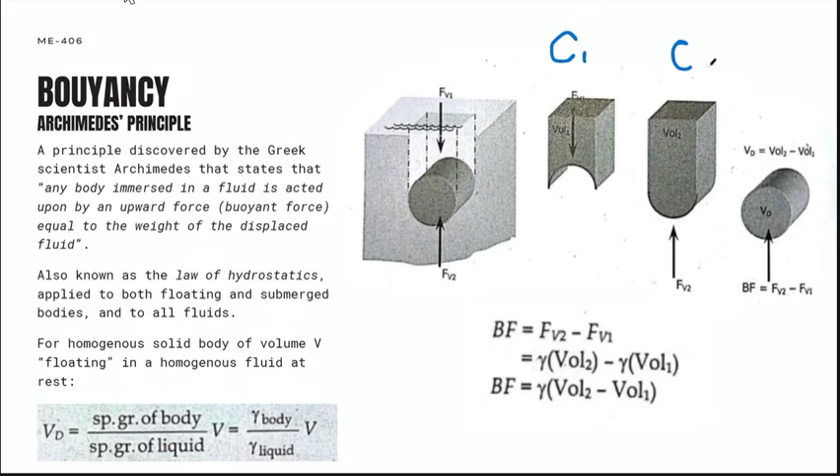If you recall, this is case 1 for our curved surfaces, and this is case 2. You'll notice that case 2 is actually equal to this area.

Whatever fluid is in this area, whatever is in this fluid here, for us to get just this area, we would need this shape, then this volume. When we subtract this from this, we get the displaced volume.

Volume 2 minus volume 1 is equal to the displaced volume. And whatever force is here, the force at 2, and the force at 1, which is the force exerted by the amount of fluid here and the force exerted by the amount of fluid here, we can see that their difference is actually the buoyant force.

Again, the principle is that any body immersed in a fluid is acted upon by an upward force called the buoyant force, which is equal to the weight of the displaced fluid - this being the displaced fluid, this shape here.

Now we can express the buoyant force (BF) as the specific weight of the fluid multiplied by the volume of the displaced fluid, this being the specific weight of the surrounding fluid, multiplied by the displaced volume.

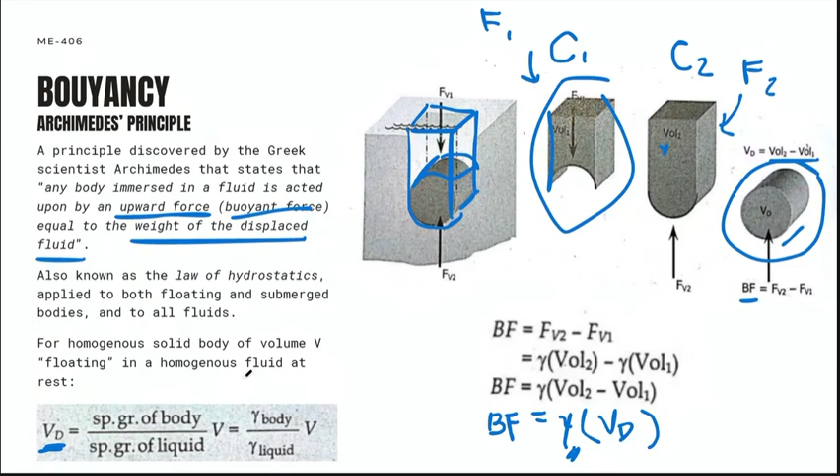We can also calculate the displaced volume in a case where the body and the fluid are homogeneous - meaning the composition of the body and the fluid itself are uniform. So here, it is the ratio of the specific gravity of the body to the specific gravity of the liquid, multiplied by the total volume.

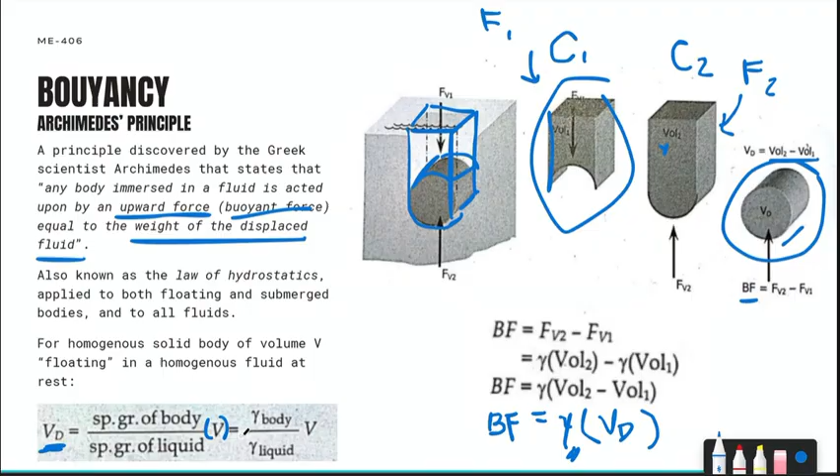The total volume being volume number 2. This is actually the total volume, this entire thing, this entire shape.

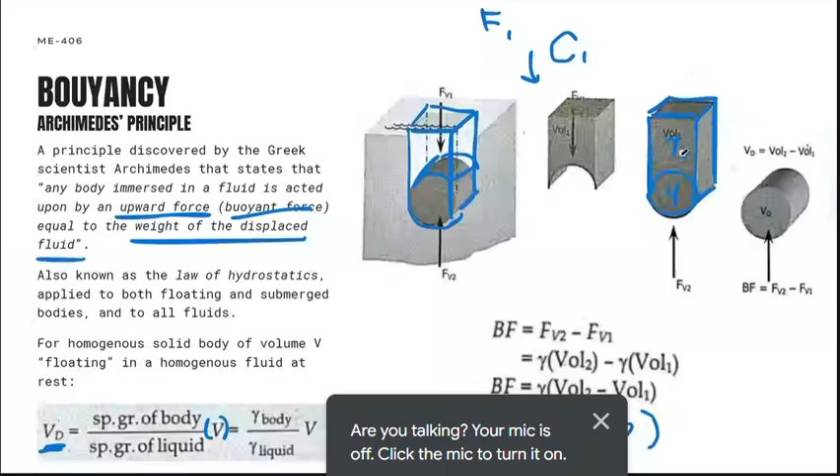Actually, let's reconsider what to call this for this case - it is the total volume. But we'll see our use of the formula later on. Basically, since it has a ratio, normally this is the specific gravity of the body, and this is the specific gravity of the liquid itself, because this is a fluid.

The surrounding fluid - its composition is the same as here. So when you get the ratio of them, and then multiply it by the total body, you are able to get the displaced volume. Is that understood, everyone?

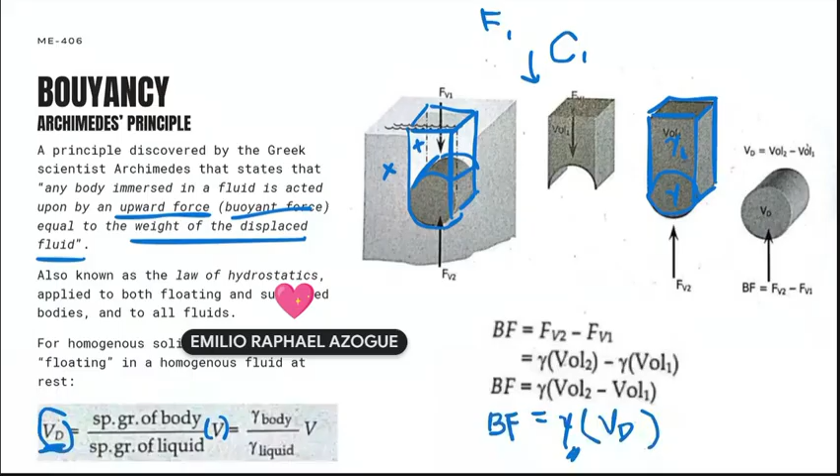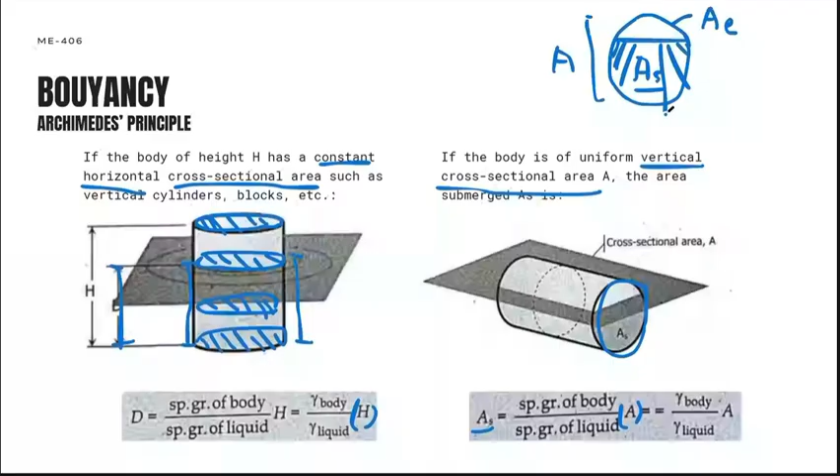We can find the area of this submerged area by having the ratio of the body over the liquid multiplied by the total cross-sectional area. This will prove useful when getting these areas or heights in problem solving later on. Is that understood, everyone?

Okay, because again, this problem solving topic is very much reliant on geometry, reliant on spatial understanding or critical understanding on spatial analysis. So let's move on to our problem solving.

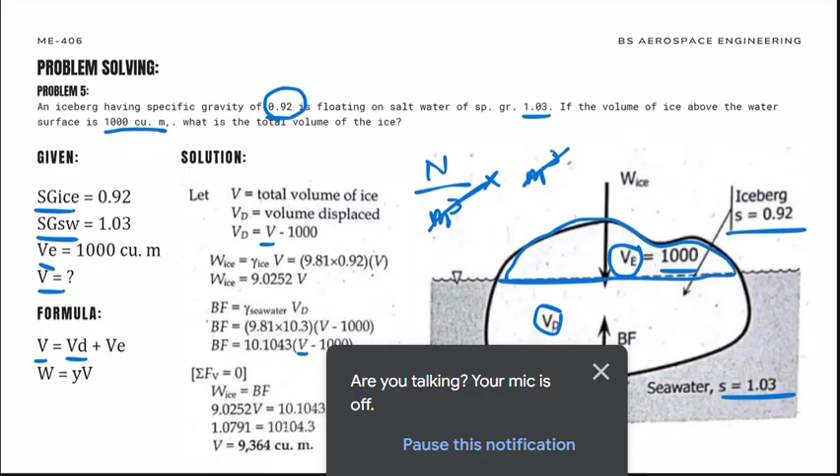So with those established formulas, let V be the total volume of ice as stated here, and VD be the volume displaced. So we express the displaced volume in terms of the total volume, because by the end we're going to be solving for V through two equations where specific values are expressed in terms of the total value.

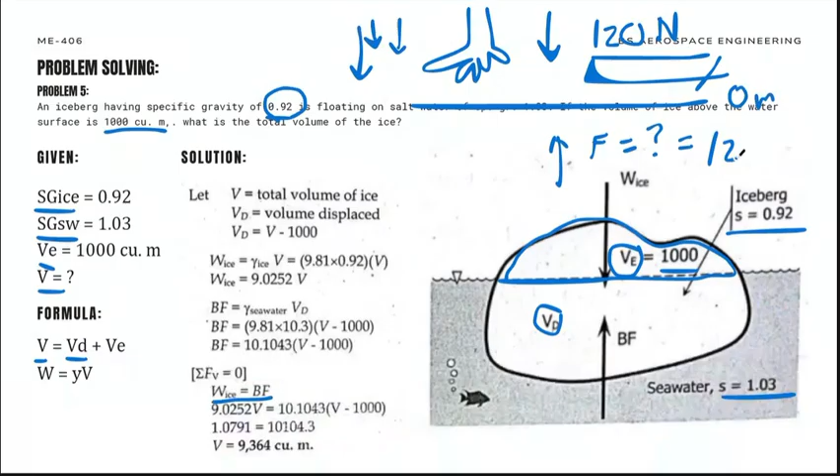Imagine, let's go back to simple classical Newtonian physics. Imagine I am pushing with a force of 120 Newtons. How much force would it take for me to reach equilibrium, or a displacement of zero? Meaning, when I'm pushing at a certain force, how much force is needed? Of course when I push, I'm moving, right? If nothing stops me, I keep moving continuously. How much force would it take to stop me so that I'm still exerting 120 Newtons of force? Of course, you're going to need 120 Newtons of force as well.

So the same principle is applied here: the weight of the ice—of course, there is a gravitational force pulling down the ice.

How much force does it take to get up? That is the buoyant force. The buoyant force is making the entire body float, so it doesn't go down. It's staying here in equilibrium. We need to establish that the weight of the ice

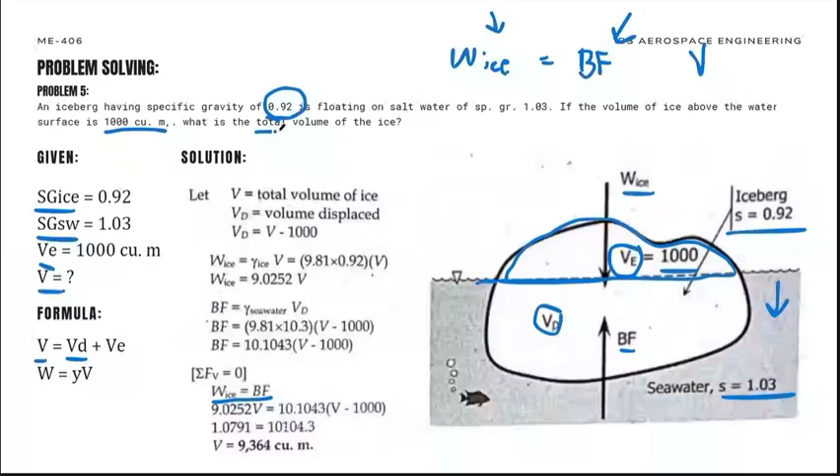is equal to the buoyant force. Because of this, we need to find the equation for this and the equation for that in terms of V, so we can solve the total volume, which is what we're looking for in the problem. Now, what is the formula for the weight of ice?

We have a couple of formulas. We have mass times gravity. But however, we need to express it in terms of V. What formula of weight includes V?

It's actually the specific weight multiplied by V, because the specific weight multiplied by the volume leaves us with a force value. Because of that, we have this: the specific weight of ice multiplied by the total volume.

How do we find the specific weight of ice? Going back to our property of fluids lesson, the specific weight of ice can be attained by multiplying the specific weight of water by its specific gravity. The specific gravity is the ratio of the specific weight of the fluid or body over the specific weight of water. The same applies for the density of the fluid over the density of water.

If we want to get this, we multiply the specific weight of water by the specific gravity. Just a recap of what we've learned before. We have 9.81, the specific weight of water, multiplied by 0.92, the specific gravity of the iceberg. Multiplying that together, we get the weight of ice equals 9.0252 multiplied by the volume. That's one equation we'll use later.

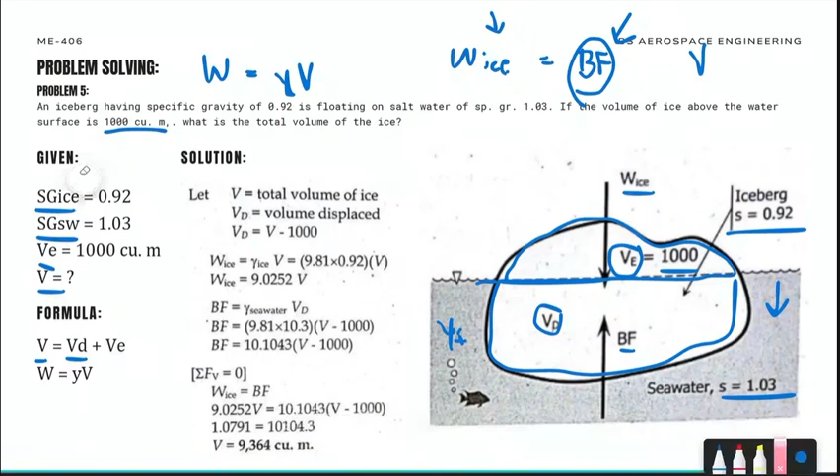Since we have our first equation and second equation, and they're equal, we can equate them. When we equate them, we have a single missing variable, V. You multiply this to this, subtract this from this, transpose this, and you eventually get this formula - it should have a V. You divide both sides by 1.0791, and you get the total volume, which is 9,364 cubic meters. That's how you attain the total volume of the iceberg in this problem.

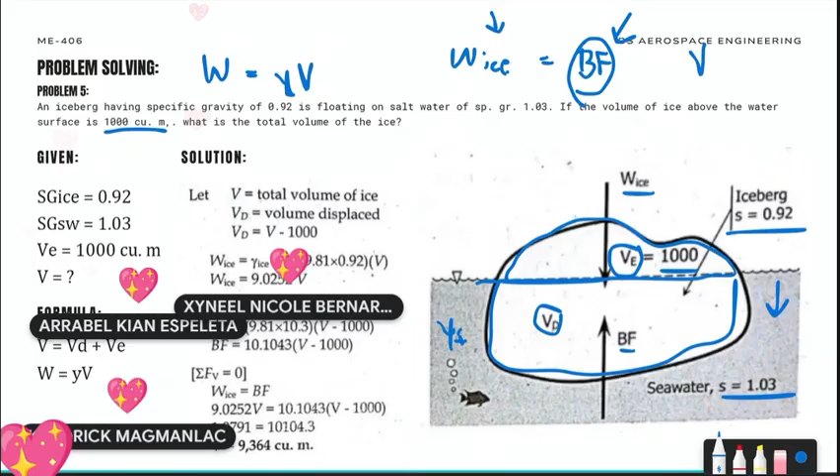Is that understood, everyone? Any questions? Okay, no questions so far.

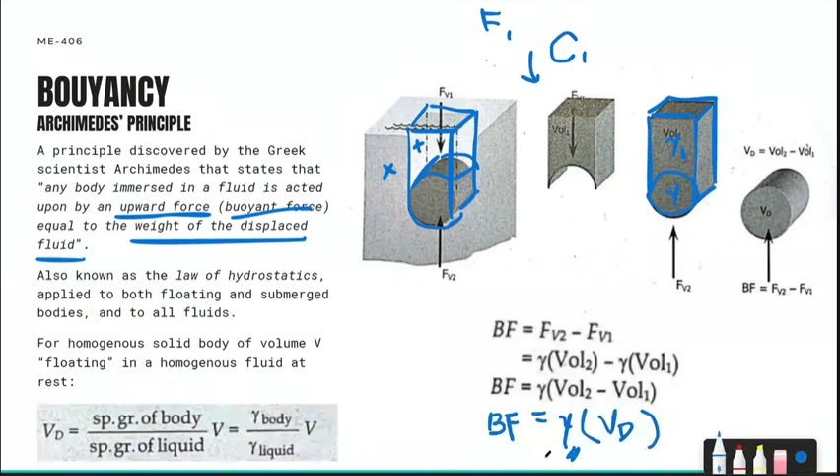Let's move on to another buoyant force problem. Actually, we have an alternate solution here. Didn't we mention before that the displaced volume can actually be calculated by having the ratio of the body and the liquid multiplied by the total volume?

Using that idea, the ratio of the specific weight of the body over the specific weight of the liquid, or the specific gravity directly, that's fine too. We multiply it by the total volume of the body. Since this is what we're looking for, how do we express the total displaced volume? The displaced volume is equal to the total volume minus 1,000, which is this.

Because of that, we have an equilibrium again in terms of total volume. To solve this, shift solve or transpose, and you get the same value of 9,364 cubic meters. Is that understood, utilizing that concept?

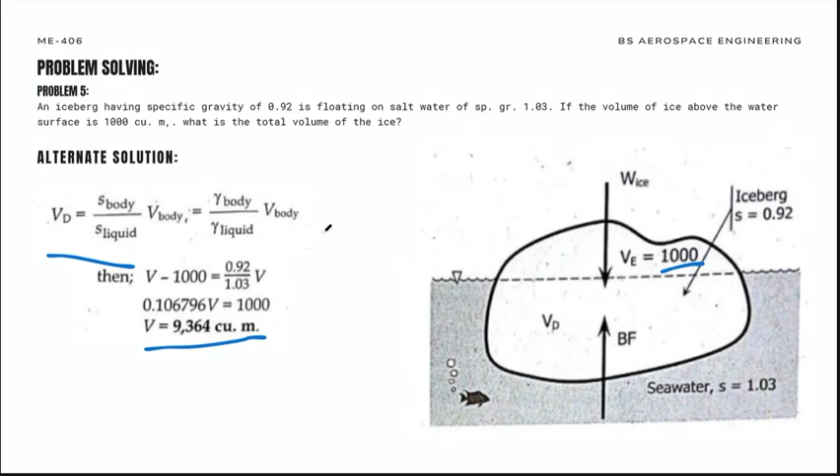Okay, thank you so much.

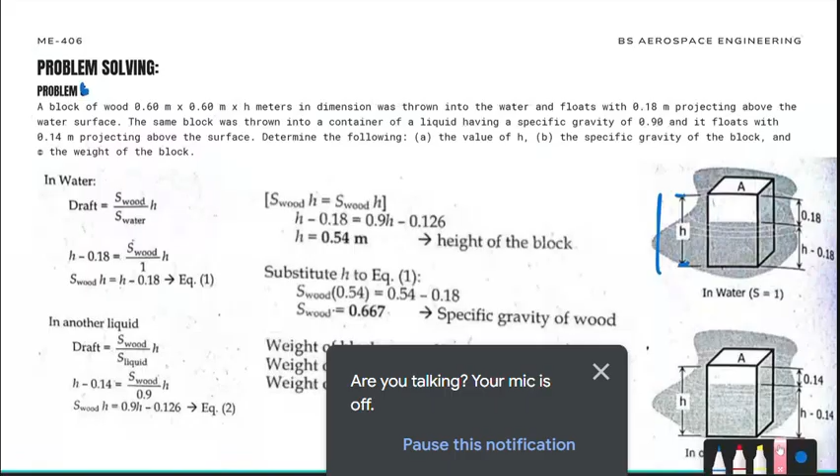Now let's move on to another buoyant force problem ulit. So ito naman, another problem, number 6 dapat ito. A block of wood, 0.60 meters by 0.60 meters by h height, ito may specific h na height daw siya, in dimension, was thrown into water and floats with 0.18 projecting above the water surface. So kapag tinapon daw yung block of wood na ito into water, you have a height of 0.18 doon sa floating, yung sa exposed na height.

The same block naman ulit is thrown into another container of liquid with a specific gravity of 0.9 and it floats with 0.14. May projecting height siya of 0.14 on the exposed surface. Determine the following. What is the value of h? Ano yung total height ng block? What's the specific gravity of the block? And what is the weight of the block?

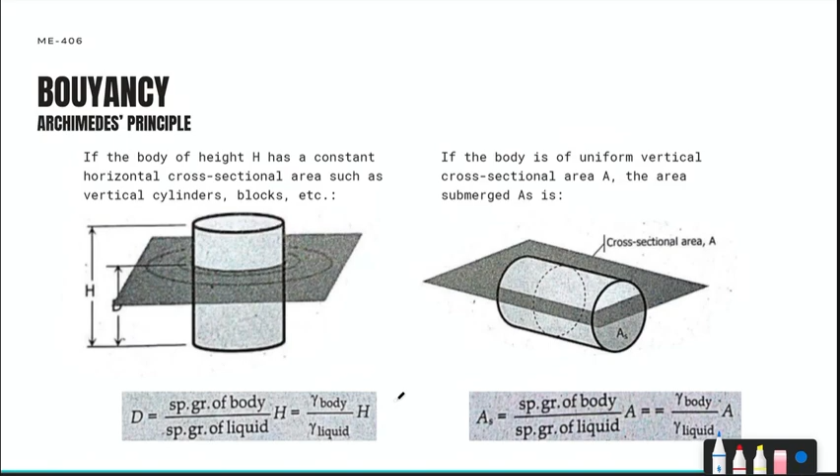Now, in water daw, the principle we're going to be utilizing here is this formula. Why? Bakit? Kasi, again, this is a uniform horizontal cross section. 'Di ba yung cross section na ito, this area is the same as this area, kasi vertically siya, 'di ba? It has a uniform cross section. So dahil dyan, we can use the formula that I pointed out kanina.

The draft is equal to the ratio of the specific gravity of the body, that body being composed of wood, over the specific gravity of water, multiplied pala by the total height. Dahil dyan, we can retain this kasi hinahanap natin yung height, di ba? Value of h. How do we express another formula for draft?

Simple. Kasi draft is just the submerged height of the body, di ba? We have the total height and we have the exposed. So the draft is equal to the total height minus kung ano yung exposed, kasi makukuha lang natin yung height of what is submerged. So that is h minus 0.18. Considering that the specific gravity of water is equal to 1 lang, we can simplify this to the specific gravity of wood multiplied by the total height is equal to h minus 0.18. So that is our first equation.

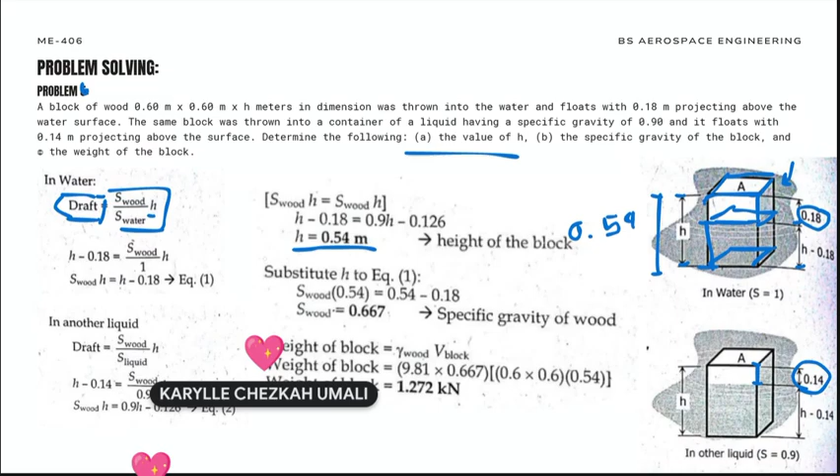Now we were able to get the value of h. We're going to be finding the specific gravity naman. How do we do that? We established previous equations, diba, and that equation has specific gravity. We just substitute h. Specific gravity of wood multiplied by 0.54, the total height of the block, is equal to 0.54 minus 0.18, which is the submerged height. So the specific gravity of wood is 0.667.

And then, for the weight of the block naman, since we have the specific gravity of the wood na, we can use our trusty equation for weight, which is the specific weight multiplied by the volume of the block.

So how do we get the specific weight? The specific weight is equal to the specific weight of water multiplied by the specific gravity of the wood. Hindi ko na siya ulit i-explain kung bakit siya naging ganon kasi nakakatatlong explain na ako. But we get the specific weight of that wood and then we'll multiply it by the volume. Paano natin mahanap yung volume?

Again, yung sinasabi ko before na volume formula, which is just the area, width times length times height para makuha yung volume. For a prism ito. 'Di ba last time sinabi ko, merong area and then parang pinrotrude lang natin siya. Minultiply lang siya by h. The same is applied here, considering that we have uniform cross sections, 'di ba?

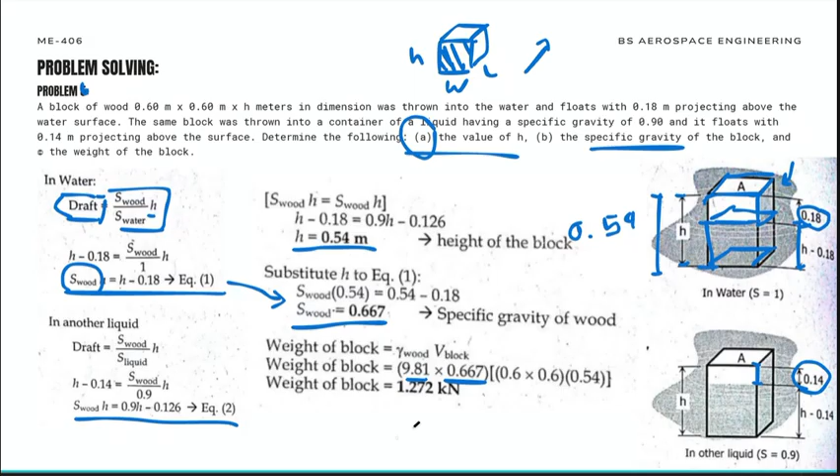So, because of that, we have 0.6 times 0.6, which is stated dito before, multiplied by 0.54, which is the total height, 'di ba? So, pinag-multiply natin ito by this to this. And solving for that equation, we get the weight of the block is equal to 1.272 kilonewtons. Okay? Is that understood, everyone?

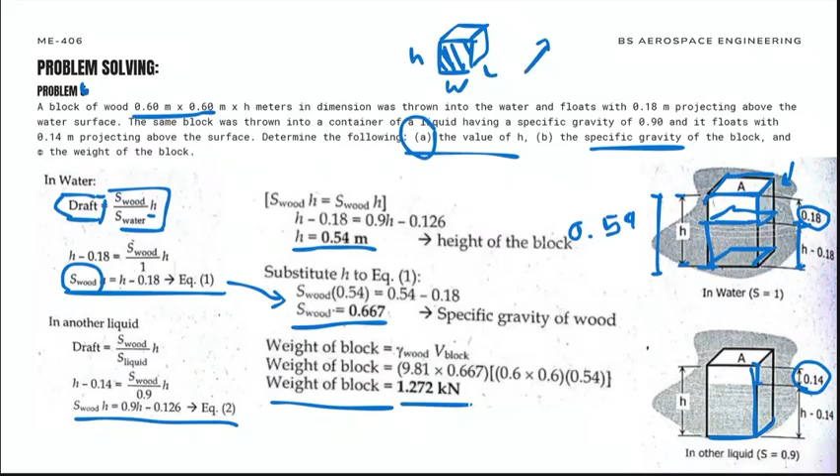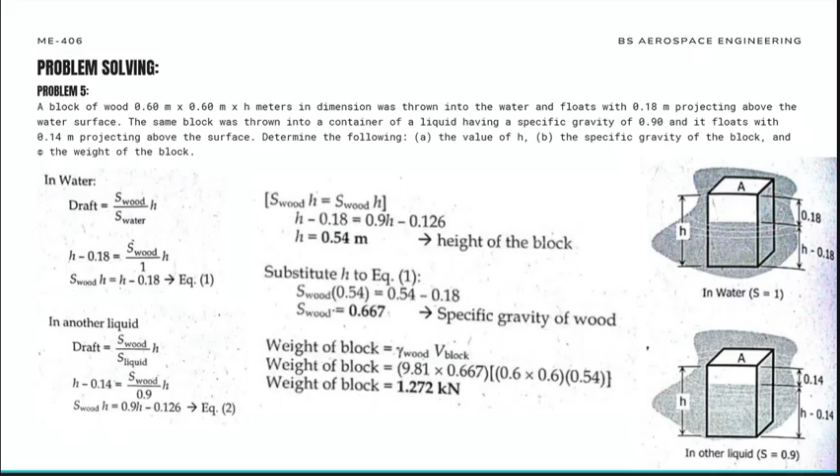Okay. So if no questions, that is actually it for our buoyant force discussion. We're now going to be moving on to our next topic, which is introduction to fluid flow. Saan yan? Introduction to fluid flow. Sandali. And the energy and mechanical efficiency.

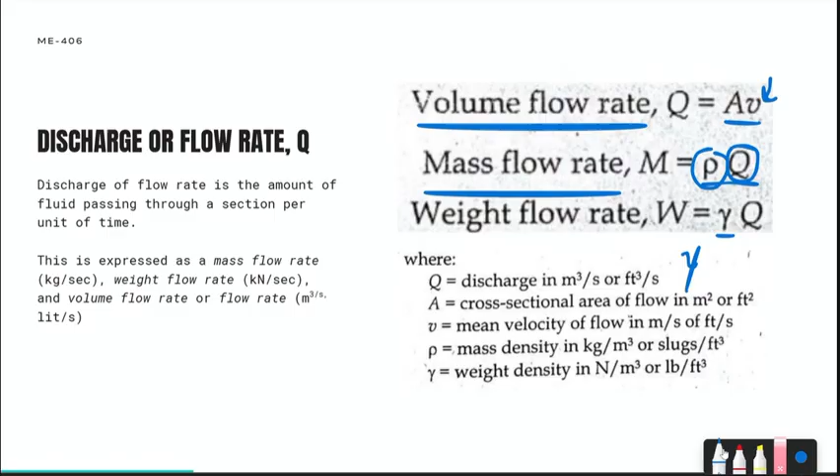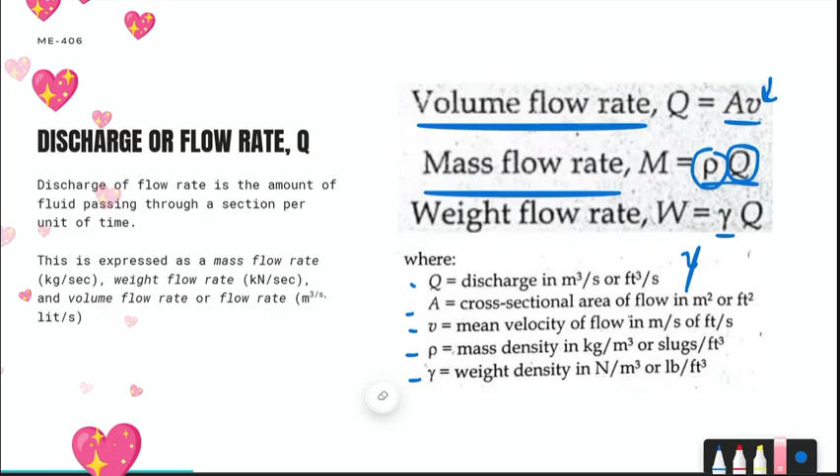And for this, given na define ko na naman yung each variables. Is that understood, everyone? Formulas pa lang to. Okay. So keeping those formulas in mind, we have the definition of terms naman. So, definition of terms, hindi ko siya masyadong gagawin in detail yung pag-discuss natin kasi I do believe na mas nagiging practical yung application natin ng mga terms in problem solving instead. Excuse me, sorry.

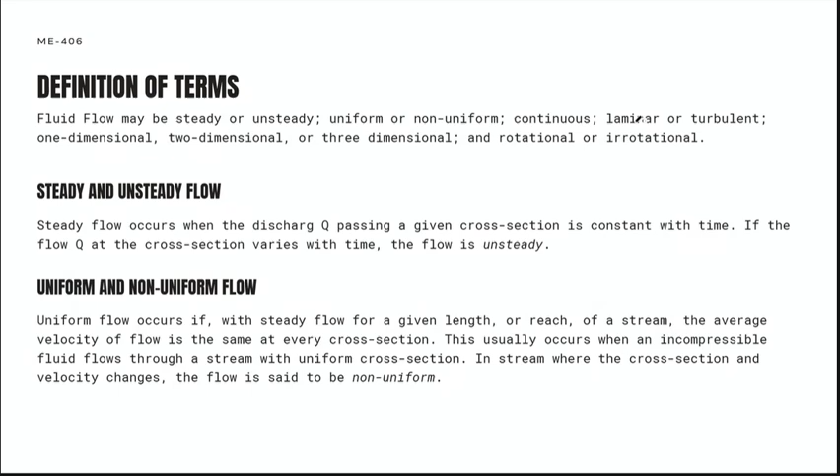So, fluid flow may be steady or unsteady, uniform or non-uniform, continuous, laminar or turbulent, one-dimensional, two-dimensional or three-dimensional, and rotational or irrotational. So, for steady and unsteady flow, we define steady flow as something that occurs when the discharge Q passing a given cross section is constant with time.

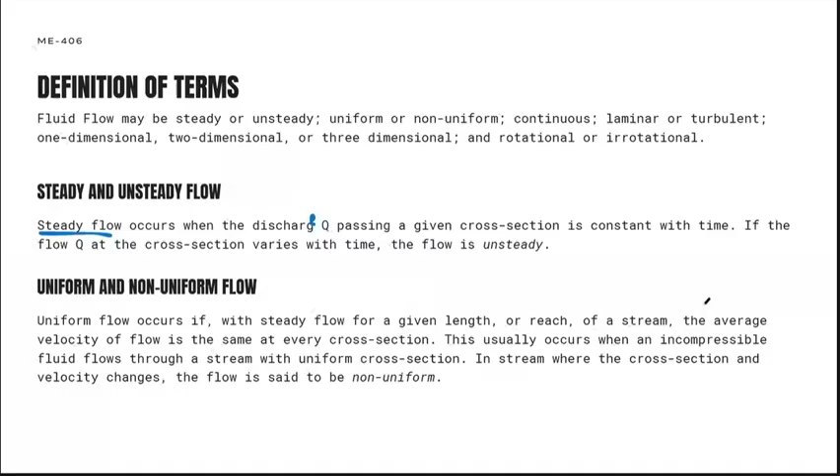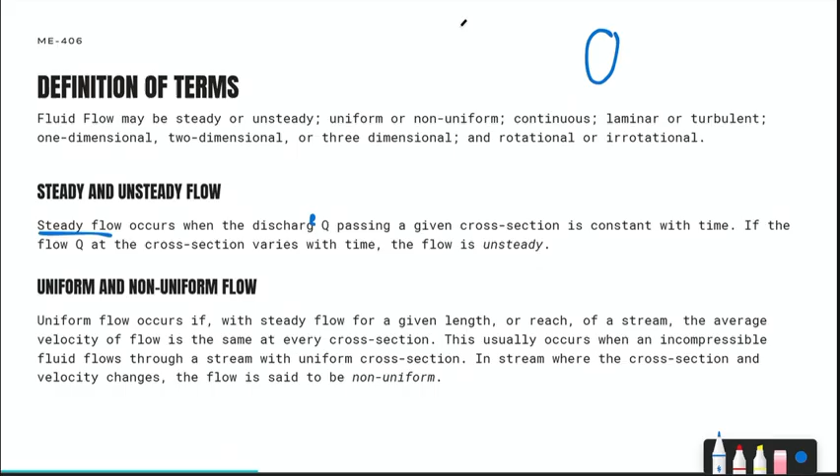What does that mean? So again, dito sa ano, gawin nating tube siya. So given this tube, at this point daw, at this cross section, at this opening, it has a specific Q or a specific volume, meter cube per second na nag-flow through the opening. When in time daw, it is the same. So parang in 2 seconds it's the same, in 3 seconds it's the same, in an hour it's the same.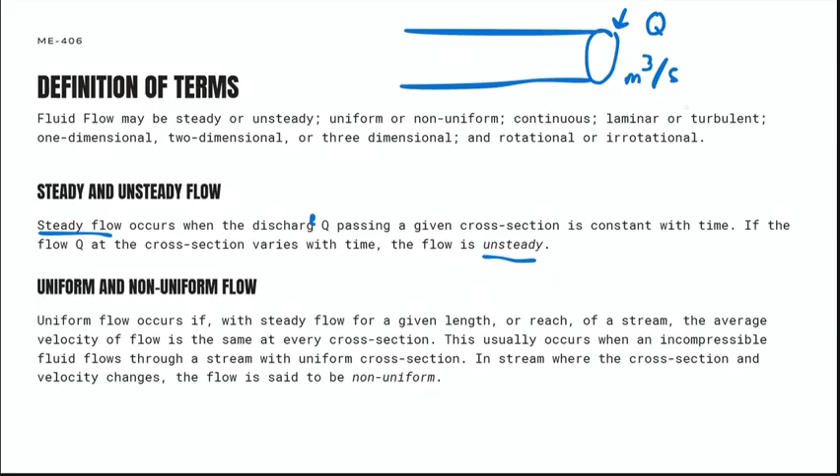But for it to be unsteady flow, the flow Q at the cross section varies with time. So parang nag-iiba-iba siya per time. Malay nyo, hihina siya by 5 seconds, hihina siya by this. So yun yung definition ng steady flow. It's basically the same discharge per unit time sa isang opening. Excuse me.

Now, moving on to uniform and non-uniform flow naman. Uniform flow occurs if, with steady flow for a given length or reach of a stream, the average velocity of flow is the same at every cross section. This usually occurs when an incompressible fluid flows through a stream with uniform cross section. So sabihin natin ito, uniform cross section ito, di ba? At this point daw, and at this point, and at this point, pare-parehas yung kanilang velocity at uniform flow.

Now, kapag at this point mayroong isang specific value ng velocity and meron ditong velocity na iba din and meron ditong ibang velocity, usually dahil yung fluid ay compressible and then nag-iiba-iba din yung cross section, nagiging non-uniform na din siya. Is that understood? Yung steady and unsteady flow and uniform and non-uniform flow? Isa lang ba?

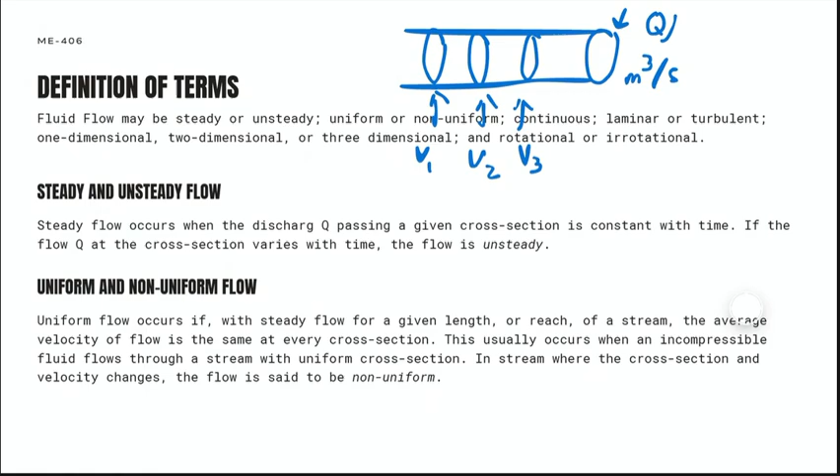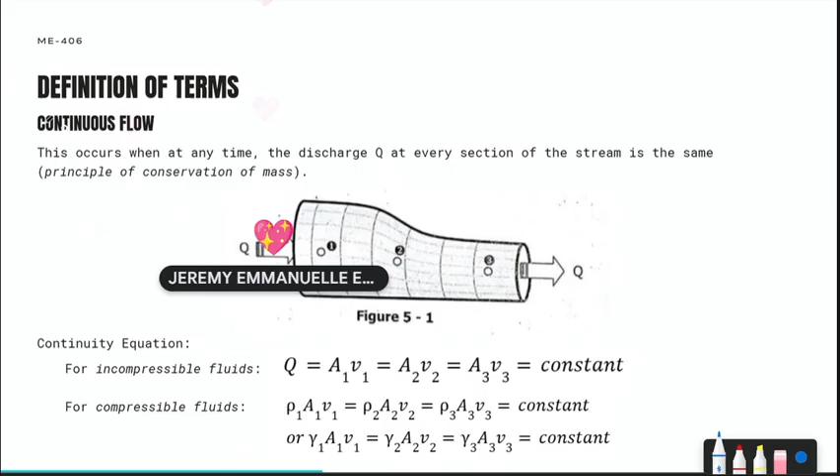Okay. So yan, moving on to another term, we have continuous flow naman. So continuous flow occurs when at any given time, the discharge Q at every section of the stream is the same. So ibig sabihin at this cross section, at this cross section, and at this cross section, parehas yung Q natin. Q1, Q2, Q3 is equal. It's actually also equal to this opening. It's also equal to this exit at any time. So it is steady and uniform. Or actually steady flow siya.

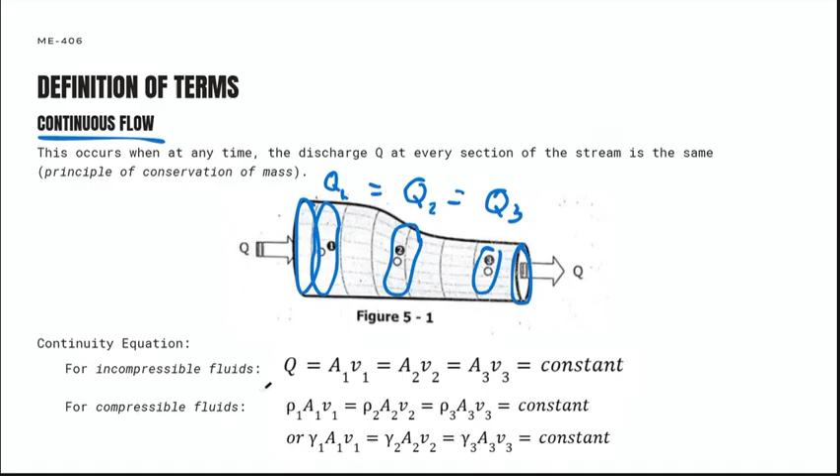And the continuity equation is defined by since Q1, Q2, Q3, and we define Q as area multiplied by velocity, it is constant all throughout different points. We have A1V1 is equal to A2V2 and A3V3. Now, for compressible fluids naman, we define compressible as something that can be compressed, di ba? And what happens when we compress something? Di ba kapag kinocompress mo ang isang bagay, binabawasan mo yung volume niya. And kapag nababawasan ang volume ng isang bagay, anong nangyayari?

Pag nagbabago yung volume niya and na-maintain yung mass niya, sabihin natin, di ba may density tayo? Kapag ang mass stays the same but the volume decreases, syempre, tataas yung ating density or nagbabago. Therefore, nag-iiba-iba yung density ng ating fluid at different points. So, ibig sabihin, nagbabago yung ating flow rate.

Ang nagiging constant sa compressible fluids ay mass flow rate. Hmm. Constant yung mass flow rate dito and constant yung ating volume flow rate dito. And the mass flow rate, constant dito ang mass flow rate and weight flow rate. Okay. So see, as demonstrated naman dito. Is that understood, everyone, the continuity equation?

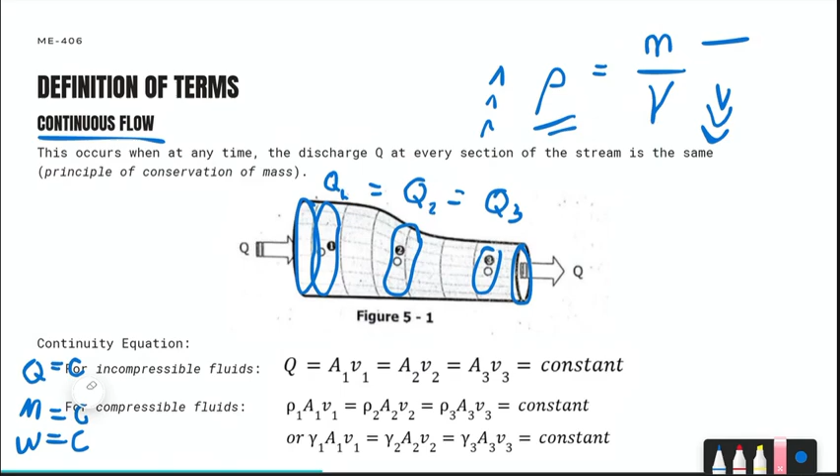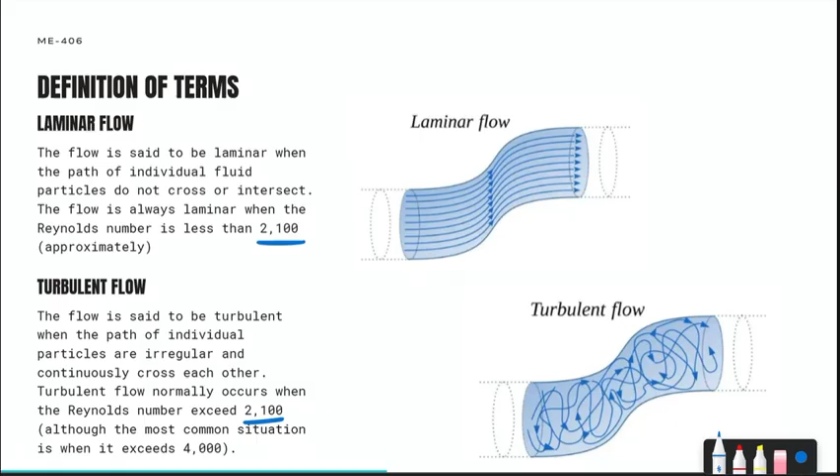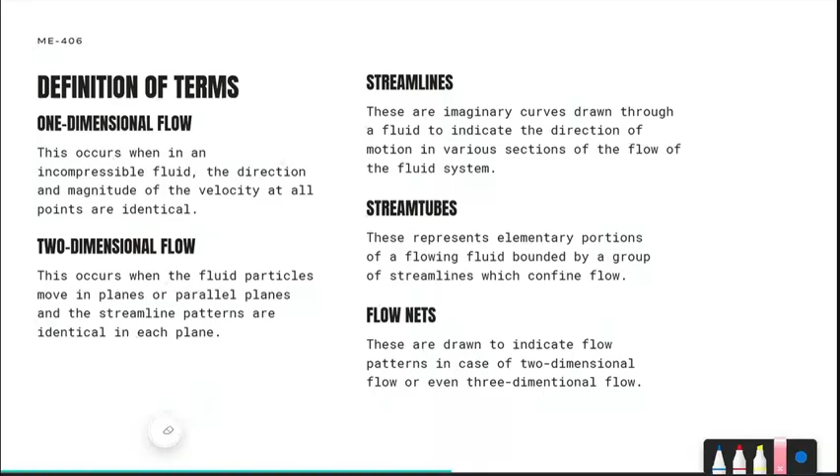Streamlines are imaginary curves drawn through a fluid to indicate the direction of motion in various sections of flow of the fluid system. So, given a tube where we have imaginary curves or imaginary lines, these are the streamlines to indicate the flow of the fluid system. So each of these are streamlines.

Whereas here, stream tubes represent elementary portions of flowing fluid bounded by a group of streamlines which confine flow. So this group is actually called a stream tube. Flow nets are drawn to indicate flow patterns in case of two-dimensional or three-dimensional flow.

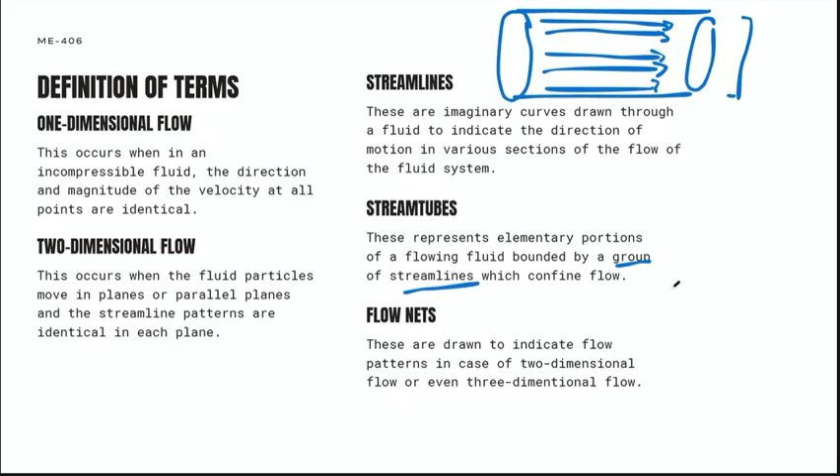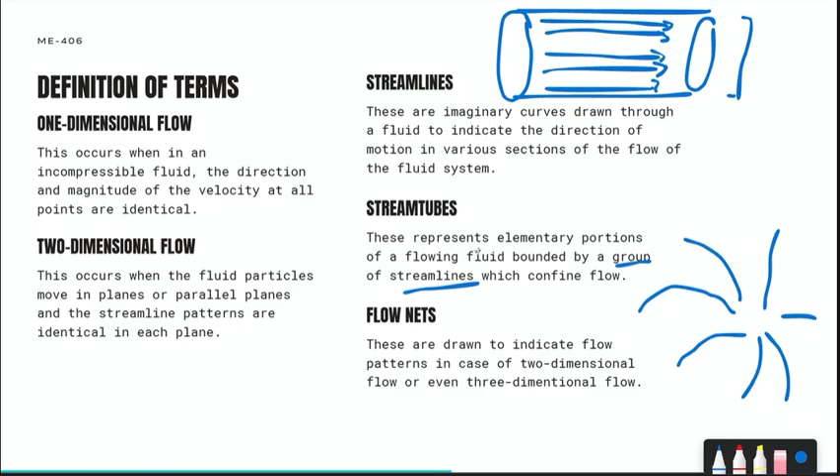When you look up flow nets, you're going to see patterns that look like this. It's actually a group of stream tubes showing where the fluid flows. So, basically, stream tubes are groups of streamlines and flow nets are groups of stream tubes. Is that understood, everyone? Concepts lang naman siya.

So, we actually have the discussion on energy and head as well. The energy possessed by a flowing fluid consists of kinetic and potential energy. The amount of energy per pound or newton of fluid is called the head. So the head is actually a unit of length. Makikita nyo mamaya what we mean by that. And the kinetic and potential energy is in joules per second or joules here.

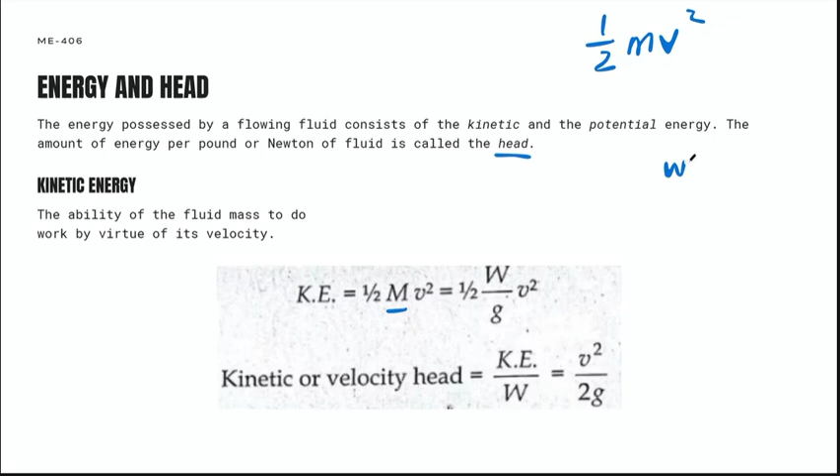Kasi if you recall correctly, our kinetic energy is 1/2 mass times velocity squared. That's our kinetic energy. But this time, we use flow rate. Mass flow rate, and then to get the kinetic energy in terms of weight flow rate, we get weight over gravity. Give me a second.

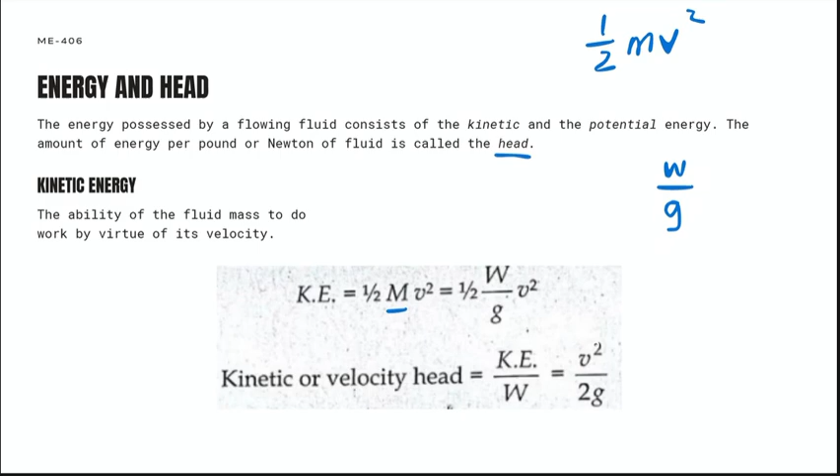So, to find the kinetic energy in terms of the weight flow rate, we express it as 1/2 weight over gravity times velocity squared. Now, the kinetic or velocity head is expressed as velocity squared over 2g. I'd rather explain it as we use them later in the problem solving.

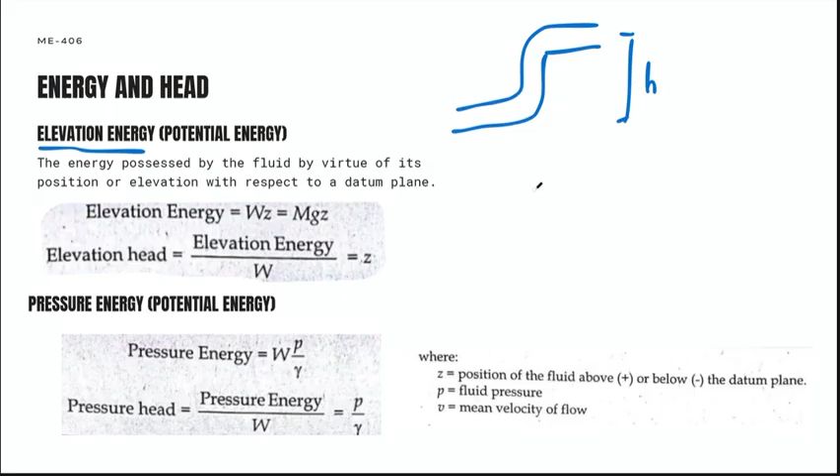Now, aside from kinetic energy, the energies present in our fluid flow include the elevation energy, which is considered potential energy, the energy possessed by the fluid by virtue of its position or elevation with respect to its datum plane. So, assuming our fluid flow rises or its height isn't uniform, there's a change in height, as indicated by the general formula for potential energy, mass times gravity times height, which is also equal to weight times height.

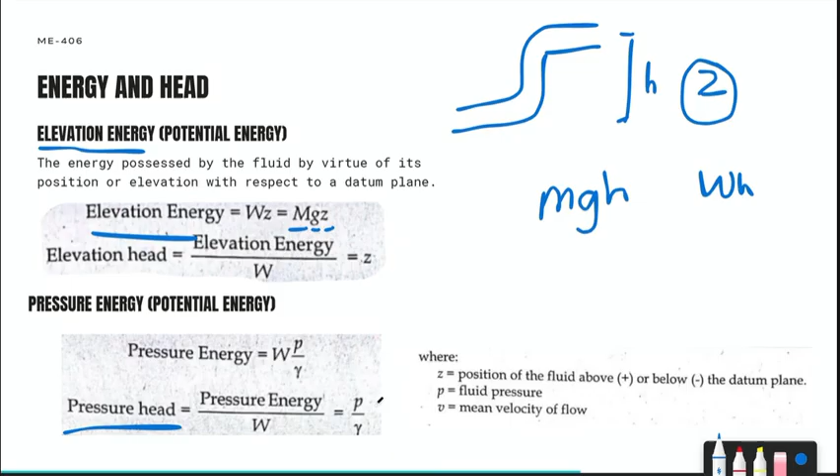We get the elevation energy is equal to the mass flow rate multiplied by gravity multiplied by z, z being the change in elevation. And the elevation head itself is z. For pressure energy, we have the weight times the pressure over the specific weight. And the pressure head is calculated by the pressure over specific weight. Okay?

And actually, typical problems call for total flow energy, E, or E specifically here actually is for total head. But the total energy, or TE or ET, depende lang sa pag-express mo, is equal to the kinetic energy plus the potential energies, which again is kanina one half mass flow rate V squared plus ano ulit yun? mgz plus, ano yung kanina? Sorry. Plus weight, pressure, specific weight. Yan yung total energy natin.

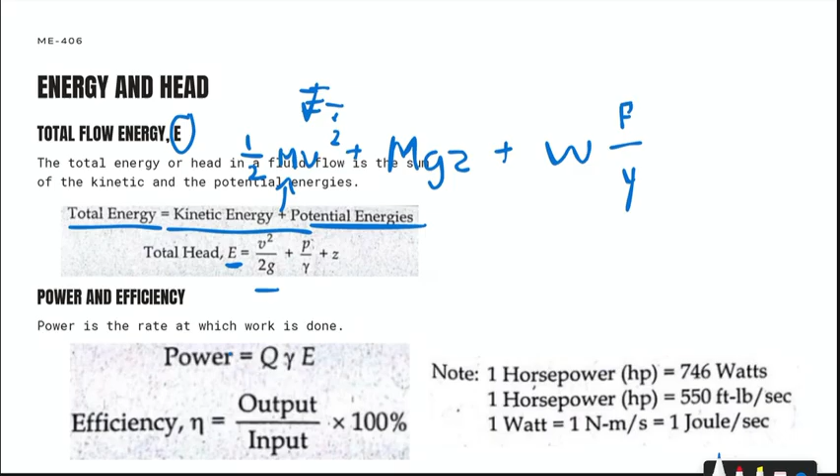And similarly, the total head is basically the energy per weight. So dito, yung head nito ng ating kinetic energy, V squared over 2g plus pressure over gamma plus Z. So that's a unit of length. Makikita natin later sa problem solving kung paano siya nagagamit.

And then for power naman and efficiency, power is the rate at which work is done. So the power is calculated by the volumetric flow rate multiplied by the specific weight multiplied by E, or the total head. And ang efficiency niya, output over input. Given na sasabihin sa problem it has an input power, and then i-calculate niyo yung output power, you're able to calculate the efficiency there.

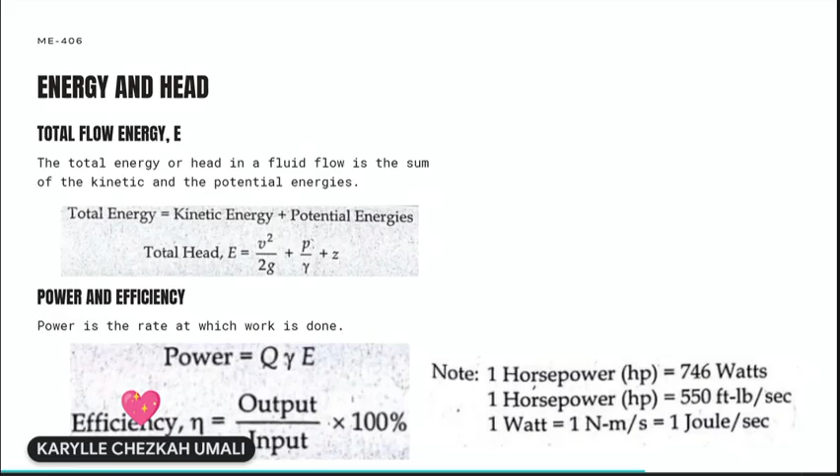Ayan. So do you have any questions so far for the formulas before we dive into the problem solving? Is everything understood? Okay. Now let's move on to problem solving naman.

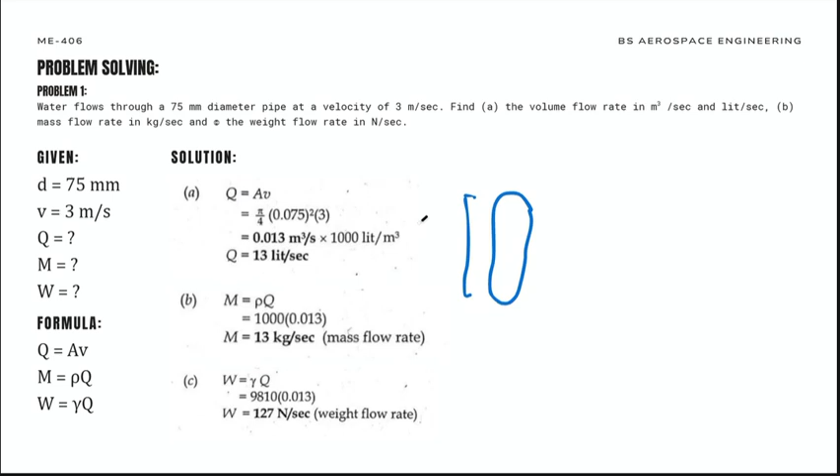So problem number 1 states that water flows through a 75 millimeter diameter pipe. Find the volume flow rate in cubic meters per second and liters per second, the mass flow rate, and the weight flow rate in Newtons per second. So paano natin hahanapin yon? Una, hanapin muna natin yung given. We have the diameter, 75 millimeters, and at this cross section it has a velocity of 3 meters per second. Hahanapin natin yung volume flow rate, mass flow rate, and weight flow rate.

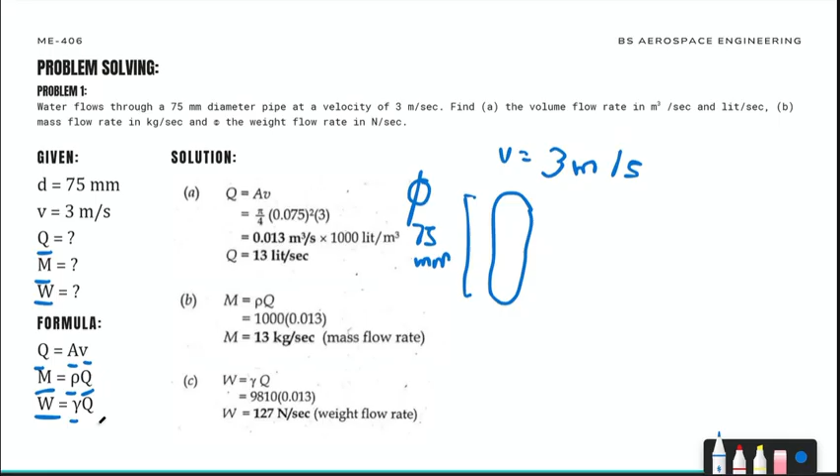Since may given na tayo and we know the unknowns, we have the formula for Q, which is the area times the velocity. Mass flow rate is equal to the density times the volumetric flow rate. And the weight flow rate is equal to the specific weight multiplied by the volume flow rate Q.

So paano natin hahanapin yung area muna? Considering that it is a pipe, it is a circular cross-section, 75 millimeters ang diameter. How do we find the area of this? Pi over 4 diameter squared, or pi r squared, given na hatiin mo yung diameter. So ano yung kalahati ng 75? That is 37.5. Ayan.

Given that equation for the area, we have pi over 4 multiplied by 0.075 squared, which is just 75 millimeters converted to meters, divided by 1,000 millimeters, di ba? Then multiplied by 3 meters per second. Solving that, we get a volume flow rate of 0.013 cubic meters per second.

And since hinahanap din natin yung liters per second, since nahanap na natin yung cubic meters per second, we're now going to convert it to liters per second. How many liters are there in a cubic meter? That is 1,000 liters. So 0.013 cubic meters per second multiplied by 1,000 liters over cubic meter, cancel. We get 13 liters per second.

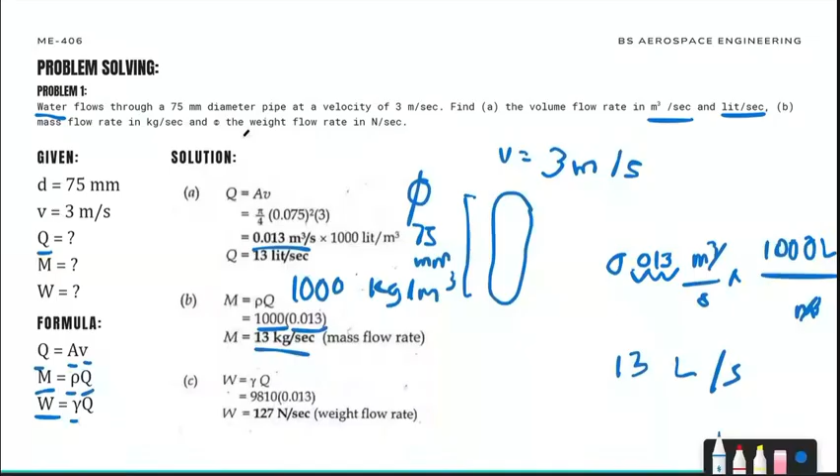And again, we're trying to find the weight flow rate. We now found the volumetric flow rate, the mass flow rate. We're now looking for the weight flow rate, which is equal to the specific weight multiplied by the volume flow rate. And the specific weight is equal to

9,810 newtons per meter cube, or 9.81 kilonewtons per meter cube. But since we're looking for the answer in newtons per second, we're going to use this one. So it's 9,810 times the volumetric flow rate, which is 0.013 meter cube per second. We get 127 newtons per second.

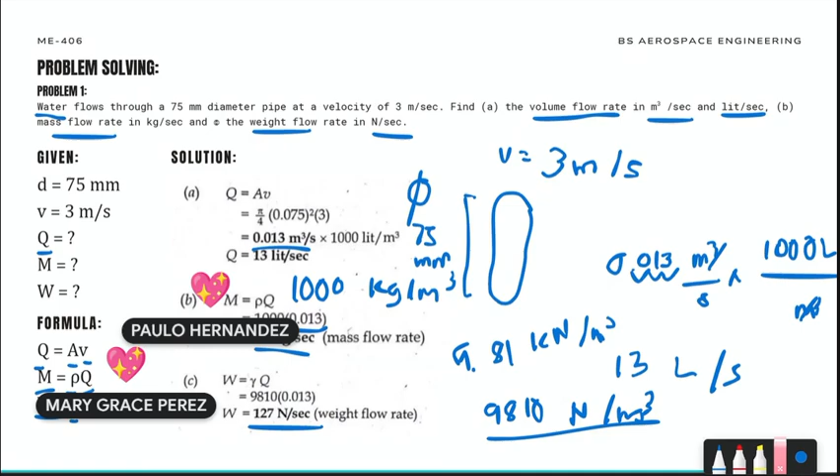So that's how we solve for the volume flow rate, mass flow rate, and the weight flow rate. Is that understood, everyone? Any questions? Okay, it's actually very simple, since you just use the formulas and then solve for the area.

Let's move on to our next problem. A 100 millimeter diameter plunger is being pushed at 60 millimeters per second, or converted, 0.06 meters per second, into a tank filled with oil having a specific gravity of 0.82. If the fluid is incompressible, it means that the discharge at different points is equal.

How many newtons per second of oil is being forced out at a 30 millimeter diameter hole? So newtons per second, what is that? That is the weight flow rate, right? Okay. So because of that, let's state our givens first.

We have a diameter of 100 millimeters for the first opening, and a velocity of 60 millimeters per second, or 0.06 meters per second. And the specific gravity of the fluid, which is oil, is 0.82. And the diameter for the second opening is 30 millimeters. So that means we have a volumetric flow rate and discharge here.

So that means the discharges are equal. So our formula is Q1 is equal to Q2, where Q is equal to the area multiplied by the velocity. And since the fluid is incompressible, Q1 and Q2 are equal to each other.

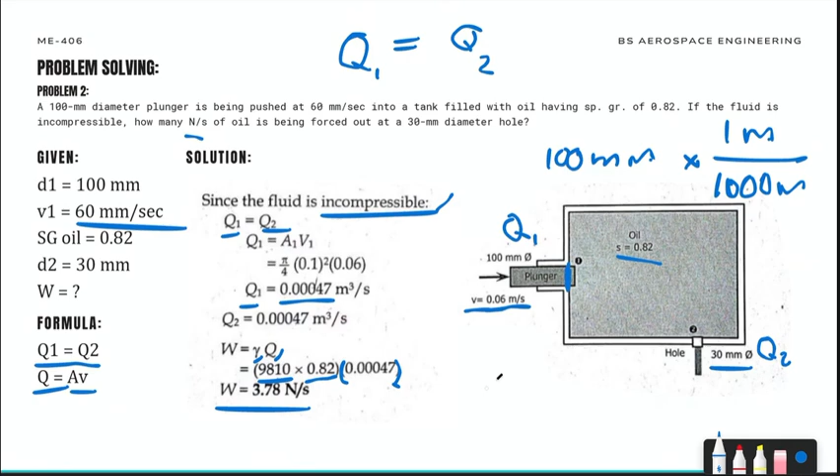And since it is incompressible and we established that Q1 and Q2 are equal to each other, Q2 is also equal to 0.00047 meter cube per second. And since we have the discharge here, and we have a diameter or area which we don't actually need to use at this point, since we already have Q2, we just have to find the weight flow rate. Since we have Q2 and we have the specific weight, which is derived from the specific weight of water multiplied by the specific gravity of the fluid multiplied by Q, we get the weight flow rate equal to 3.78 newtons per second.

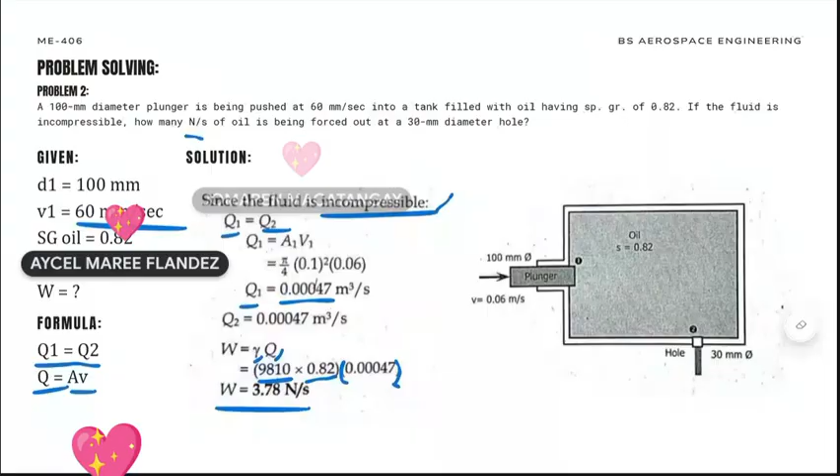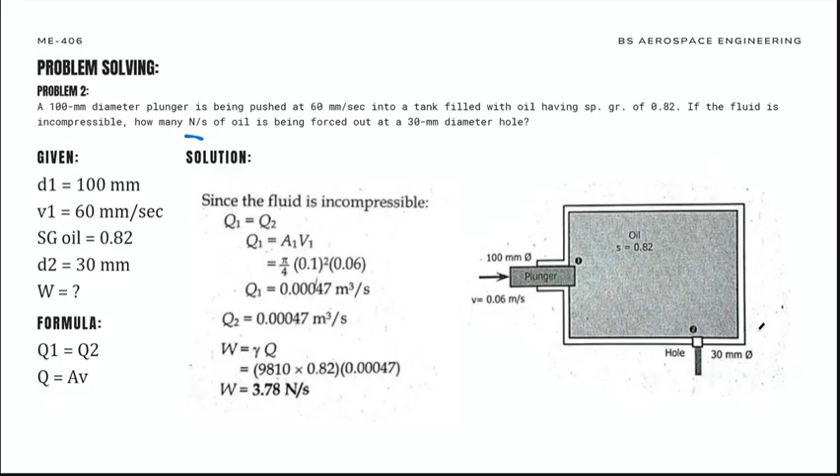Is that understood, everyone? Okay, so again, it's just using the same formulas in relation to each other, at different points. This shows the incompressible nature of the fluid as well as the continuity property. For our last problem for our lecture today,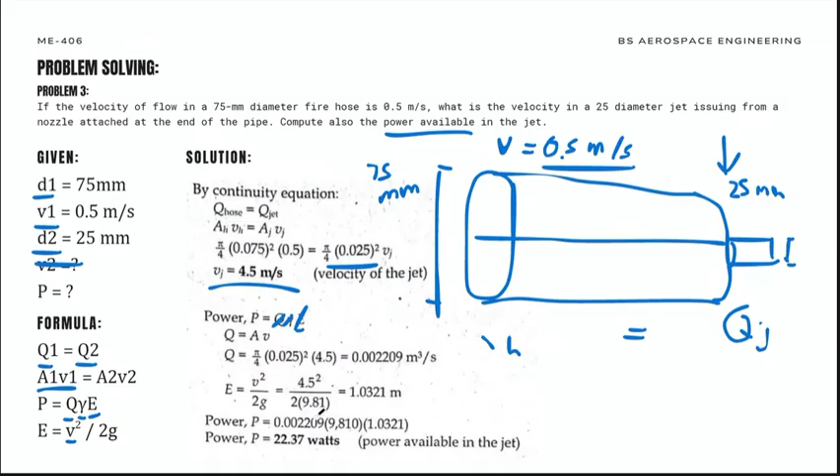With our total energy head, we are now able to complete the variables for the available power formula. P is equal to 0.002209 meter cube per second, which is the volumetric flow rate, multiplied by the specific weight of water, which is 9,810 Newton per meter cube, and 1.0321 meters, which is the total energy head. Multiply them all together, you get 22.37 watts. And watts is a unit of joules per second or Newton meter per second.

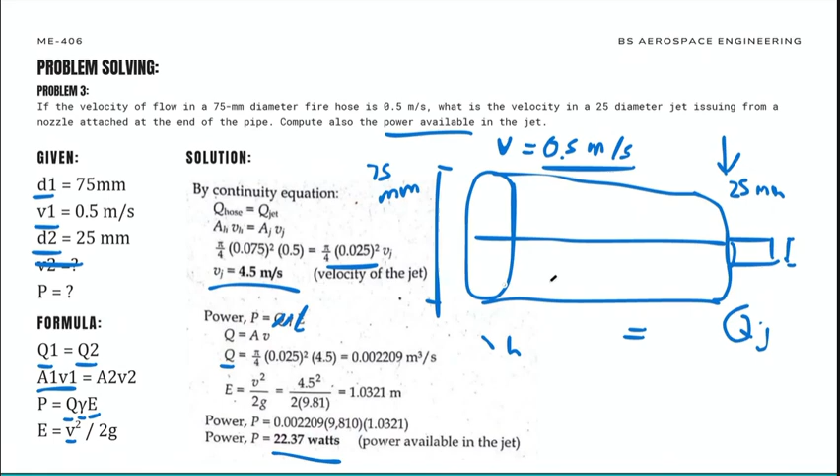Ayan. So that's how we are able to attain the power available at a specific jet, giving a continuous flow with different areas. Is that understood, everyone?